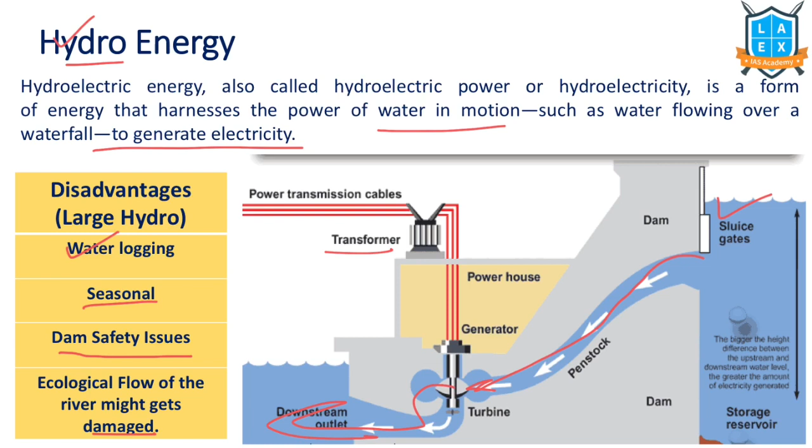The next one we'll talk about is solar energy. Solar means sun, so it is energy generated from the sun, converted into either thermal energy or electrical energy. These solar technologies can harness this energy for a variety of uses like generating electricity, providing light or a comfortable interior environment, and heating water for domestic, commercial, or industrial use.

There are many benefits of using solar energy: it is eco-friendly, economical, and renewable, being available abundantly in the environment. It is a clean source of energy with no carbon emissions, maintenance cost is low, there's less dependence on fossil fuels, and it is also a source of income for different groups of people.

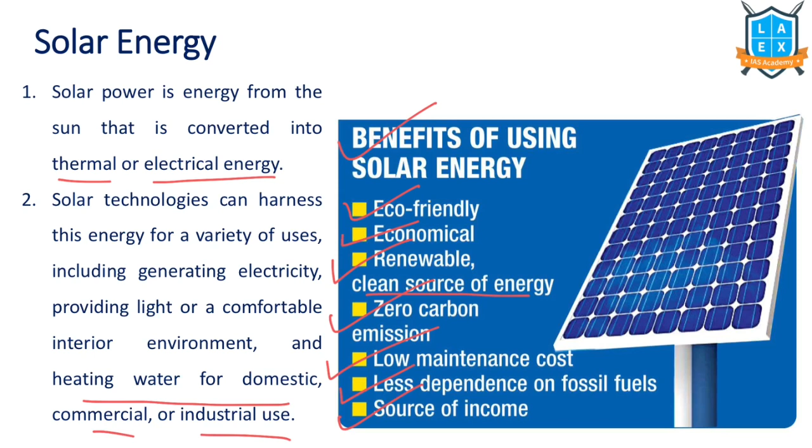This is how solar panels are placed on the terrace or roof. This is a solar panel, and this is how radiation falls on it. If you look at the solar panel, it is made up of solar modules, and each module is made up of solar cells which look like this. Each solar module makes a solar panel, and different solar panels together form a solar PV system, with these being the different parts of that system.

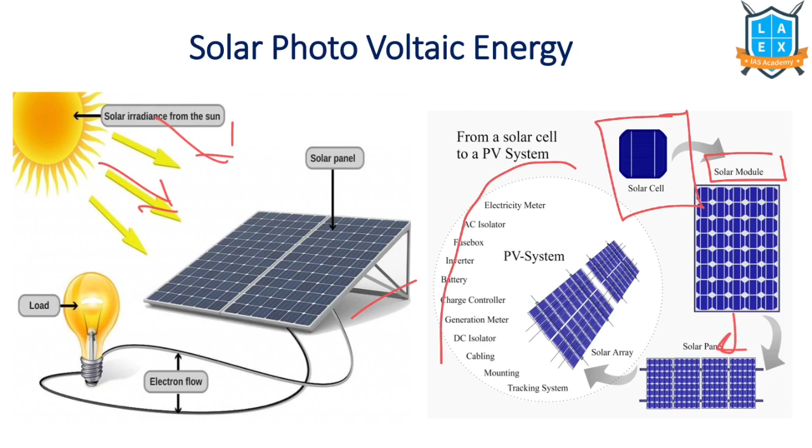The next one we're going to talk about is wind energy. Wind energy describes the process by which wind is used to generate electricity, as is obvious from the name itself. Wind turbines convert the kinetic energy in the wind into the required mechanical power.

This job can be done by a generator placed here. First, the wind with its speed blows the rotor blade, which rotates the gearbox and gives the required output, which goes to the generator. From this, power is generated and it goes to the transformer.

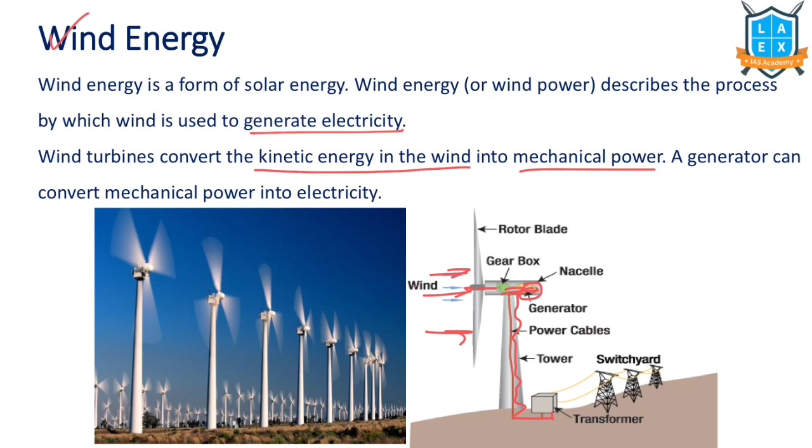So the next one is ocean thermal energy. This is a process or technology of producing energy by harnessing the temperature differences, or thermal gradients, between the ocean surface waters and the deep ocean waters. This difference is used to generate electricity.

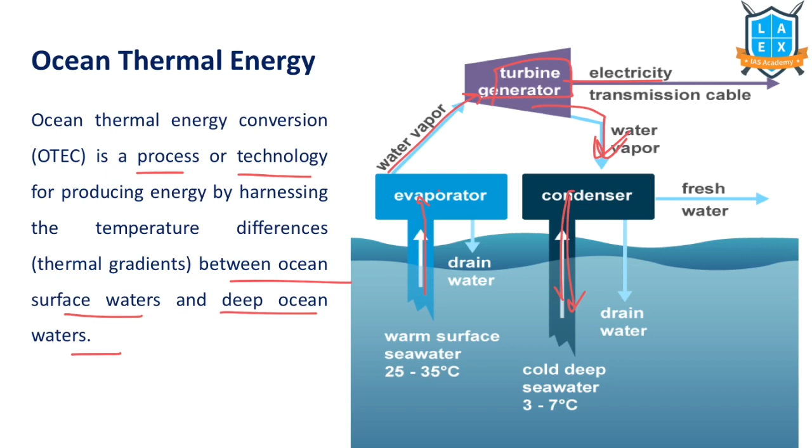Here's how it works: the water is evaporated, and this water vapor is used to run the turbine and the generator. From this, the cold water vapor is pumped into the condenser, and this water is drained back into the sea.

The next one is ocean tidal energy, which refers to the tides - the natural rise and fall of the ocean. This motion of the sea or water is used to generate a kind of renewable energy. Some of these technologies include both turbines and paddles.

Tidal energy is produced by the surge of ocean waters, meaning the rising and falling of tides. This tidal energy is renewable because as long as tides exist in the oceans, it can produce electricity. Here you can see in the picture, this is the ocean, and structures like these are placed in it.

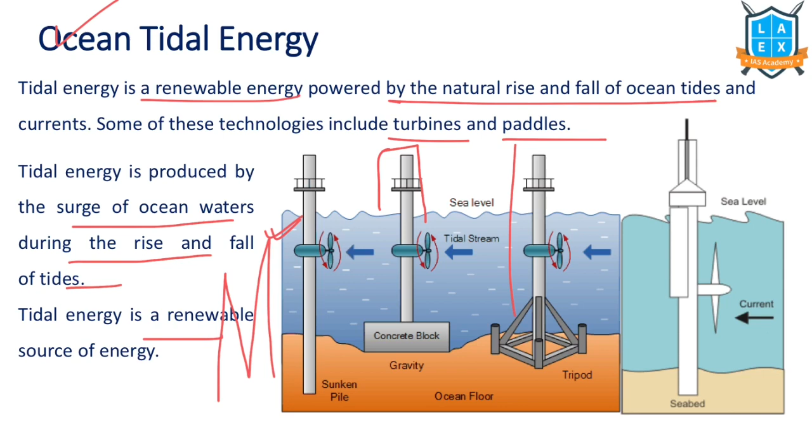The next one is geothermal energy. It's made up of two words: geo means earth, and thermal means heat. Basically, the heat inside the earth is used to generate this kind of energy, called geothermal energy. It is renewable because heat is continuously produced inside the earth. People use geothermal heat for bathing, to heat buildings, and to generate electricity.

How does this work? First, cold water is pumped into the hot water source, and these vapors are used to run the turbines placed here. The turbine is connected to a generator which produces electricity. The cold water vapor is then pumped back into the cooling tower and recirculated. This is how the power is generated.

The next one we'll talk about is hydrogen fuel cell energy. Hydrogen is considered a clean fuel because when consumed in a fuel cell, it produces only water, which is not at all harmful.

So what is this electrolytic process? The water, denoted H2O, can be separated into hydrogen and oxygen through a process called electrolysis. This takes place in an electrolyzer, which functions much like a fuel cell but in reverse. Instead of using the energy of a hydrogen molecule like a fuel cell does, an electrolyzer creates hydrogen from water molecules. This is the working of a fuel cell.

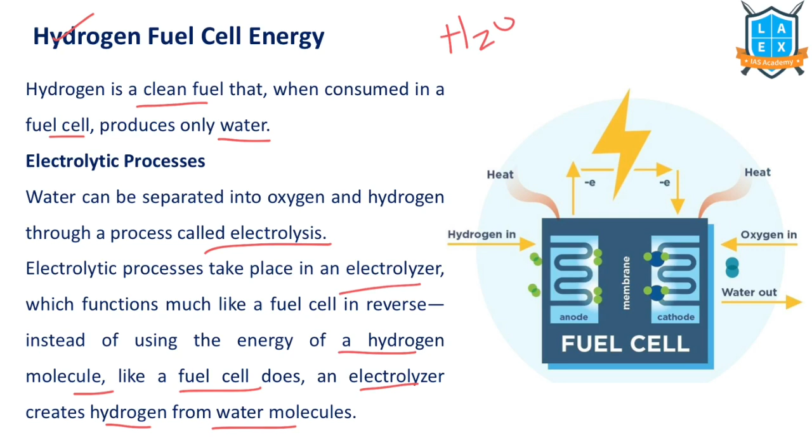Now, what is a biofuel? Any hydrocarbon fuel produced from organic matter - whether it lived earlier or is living matter - in a short period of time, which might be days, weeks, or even months, is called a biofuel. Biofuel can be of any form: solid, liquid, or gaseous.

If you look at some examples of biofuels, under solid ones you get wood, dried plant material, and manure. Liquid ones include bioethanol and biodiesel. And biogas is in gaseous form.

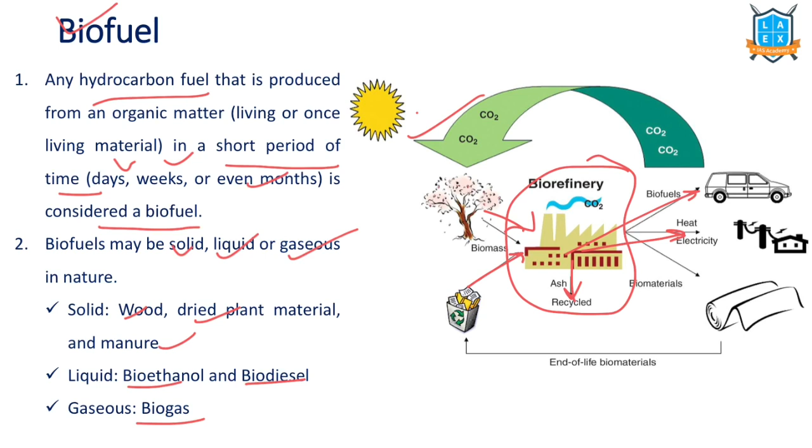This picture shows the process of how biofuel is produced. The biomass and bio-waste goes into a biorefinery where the ash is recycled, but the output material is biofuels, heat or electricity, and some biomaterials as well.

Now, if you look at the types of biofuel, they are of different generations: first, second, third, and fourth. Under the first generation, edible biomass comes like sugar beet, sugar cane, wheat, corn, etc. Under the second generation, we get non-edible biomass like wood, straw, grass, or even waste. Under the third generation, we have algal biomass, which includes both macro and microalgae. The fourth generation biofuels include breakthroughs like pyrolysis, solar to fuel, engineered algae, gasification, etc.

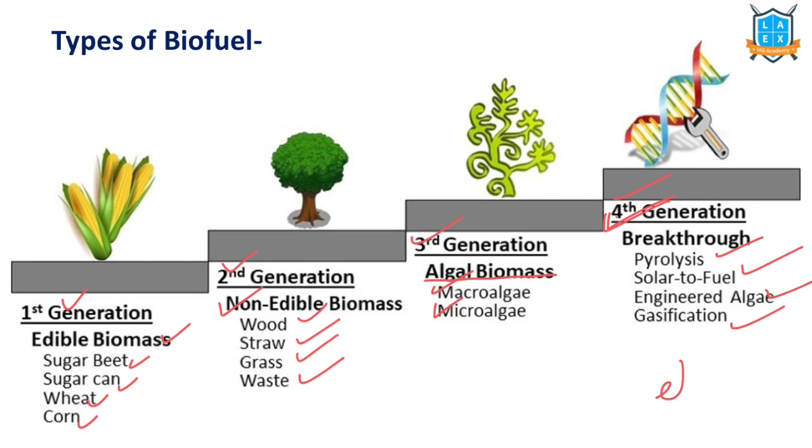Now, what is biogas and how is it produced? It is produced by anaerobic decomposition, meaning in the absence of air, decomposition of organic matter like sewage from animals and humans. The major proportion of biogas is methane and carbon dioxide, though it also has small proportions of hydrogen sulfide, hydrogen, carbon monoxide, and other things. This is commonly used for heating, electricity, and for automobiles also.

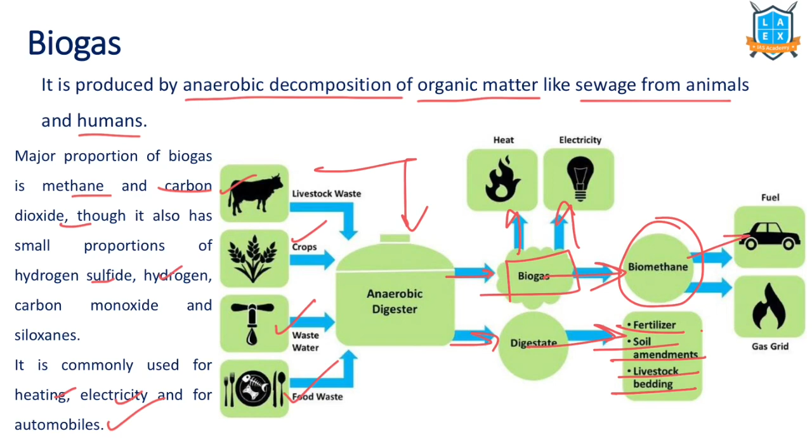And how is this produced? Livestock waste, crop waste, waste water, and food waste is pumped into an anaerobic digester, from which both biogas and digestate are produced. This digestate is nothing but fertilizer, soil amendments, and is used for livestock bedding. This biogas can be converted into heat and electricity, and also converted into biomethane, which works as a fuel and is also sent to the gas grid.

The next method is the waste to energy resource, from which waste is converted into fuel. These waste to energy plants burn municipal solid waste, often called garbage or trash, which we throw out. This is used to produce steam in a boiler, and that steam is used to generate electricity. The residues can also be used to produce biofuel and biogas.

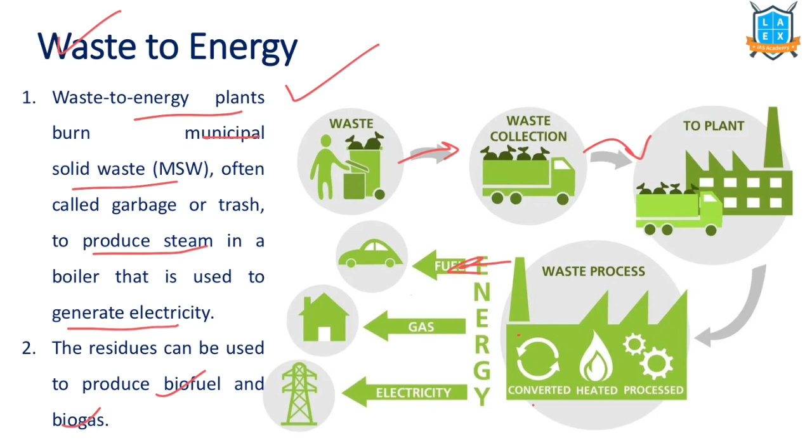In this picture, the process of production of a waste to energy plant is given. First, the waste is collected, and this waste is sent to the waste plant where processing is done, and energy is released through fuel, gas, or even electricity.

Now, let us talk about different renewable energy initiatives started in our country. Some of the government measures taken to make us self-reliant in power generation and to achieve more energy transition towards clean energy include setting the target of increasing renewable energy capacity to up to 450 gigawatts.

The second measure is phase-wise retirement of old and polluting coal-based power plants. Also, setting up ultra mega renewable energy parks to provide land and transmission to developers on a plug and play basis. The government started schemes such as the PM Kusum scheme, solar rooftop phase 2, and the 12000 megawatt CPSU scheme phase 2, etc. The government also laid down new transmission lines and created new substation capacity under the Green Energy Corridor scheme for evacuation of renewable power.

Also, notifying of bidding guidelines for the tariff-based competitive bidding process for procurement of power from grid-connected solar PV and wind projects. The government declared large hydropower projects as a renewable energy resource if they have capacity greater than 25 megawatts. Also, the hydro purchase obligation, HPO, was declared as a separate entity within the non-solar renewable purchase obligation.